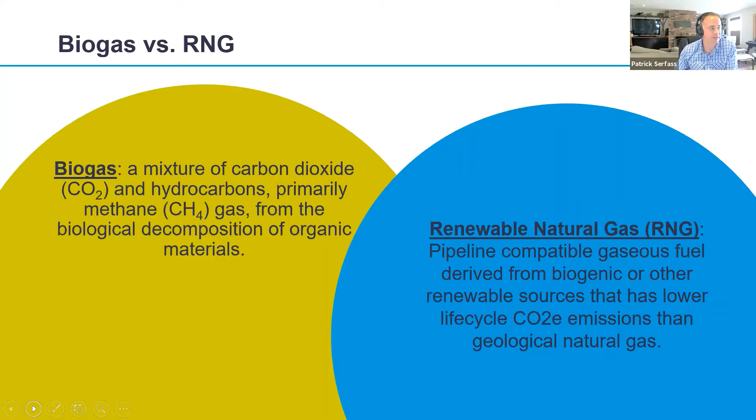And at that point, you can't really recognize the RNG molecule from a regular conventional natural gas molecule, except it's been renewably produced, and you just know that because of where it came from, but it's completely interchangeable. So RNG, when we talk about that, is pipeline interchangeable gas. You don't put biogas in the pipelines, you put RNG in the pipelines, and you generally want to do that because you're trying to get it from the producer to your customer.

Next slide, please. So I was really struggling, and Travis and Josh and Brandon were all kind of subjected to my many questions about who was going to be in the audience today and how much do we cover basics versus policy. I can just tell you that all of us are equipped to get into any level of detail that you want. I'm going to try to start at a very beginning level to make sure that anyone that's not really familiar with biogas systems has a basic level of understanding of how all this works and really how these systems are tools for you.

And what you should be taking away from this graph, besides the basic way that biogas systems work, where you have this central tank that takes in organic material. Usually it's non-woody organic material, and you can see all different kinds at the top there: manure, wastewater, sludge, food waste. You're putting that organic material into a tank. The microbes that are already present in that material, you create a nice warm environment where they multiply, and they literally eat up the organic material and burp out methane. And that methane is captured in the flexible roof or covers in the case of Brandon's and Jim's projects.

And you capture all of that methane, and then you use that to basically displace fossil fuels most of the time. And all the things at the bottom there, all the different products that biogas systems can produce. So you've got your gas-related products on the left there, your biogas, electricity, vehicle fuel, into the pipeline to use for whatever you use natural gas for, heat. These are some of the most common products, although we also create bioplastics and things like that.

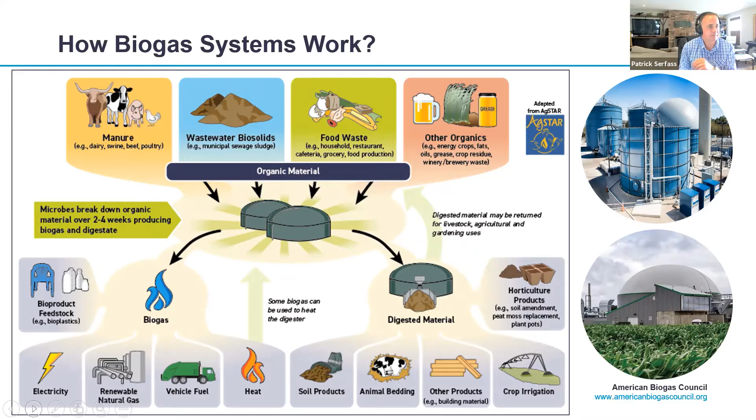Here's just some visuals for those biogas uses. So electricity, generally we're making electricity using an engine, a natural gas engine, but it could be a microturbine or a fuel cell as well. Heat there on the bottom, just like in your home, if you use gas for heat. Dell Computers, I talked about bioplastics. They actually shipped a lot of their computers in plastic bags made from biogas.

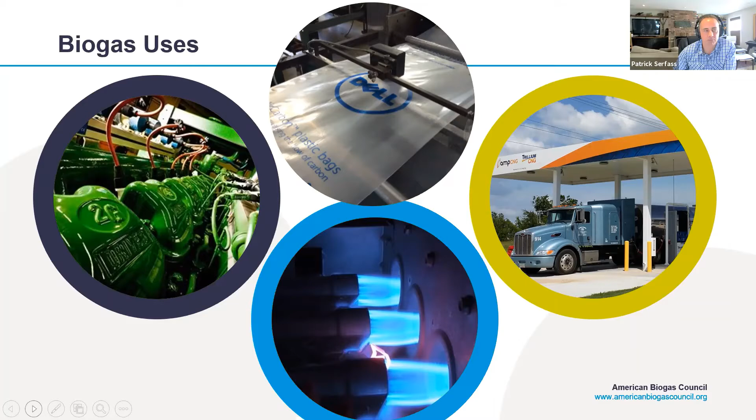Biogas has a hydrocarbon in it, methane, and so you can do all kinds of things with hydrocarbons, including making plastic. And then you can see some truck fueling. Heavy duty truck fueling is the fastest growing part of the industry. I'll get to that in a little bit. Next slide.

And here's what the digested material looks like. So you can see some liquids there on the bottom right. On the bottom right there, that food scrap project actually happens to be that Walt Disney World project I mentioned earlier. And on the left side, you can see what I'm pretty sure are two dairy-related digestates there as well. And that's the digested material after it's been processed by the biogas system.

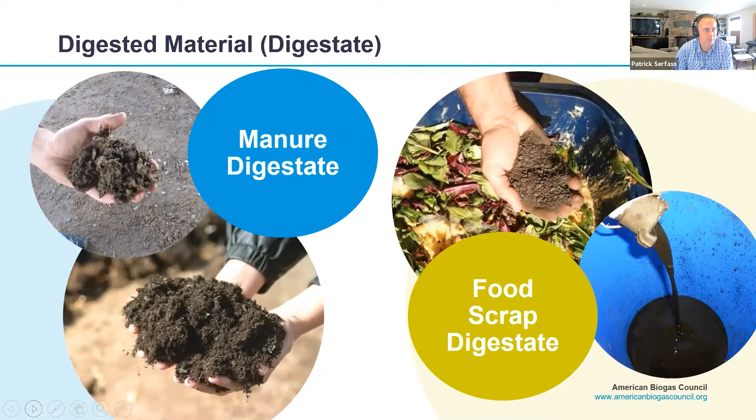Next slide. All right, so now that you have some kind of general familiarity with biogas systems, let's talk about the market a little bit. Currently in the US, in all 50 states, there are biogas systems. There's about 2,200 operational systems around the country. So there's a lot, but when you compare that to the potential in the industry, we have really just scratched the surface. We count at least 15,000 new systems that could be developed.

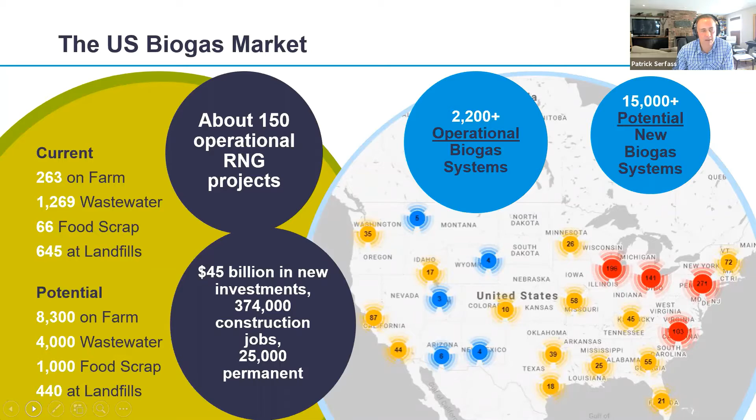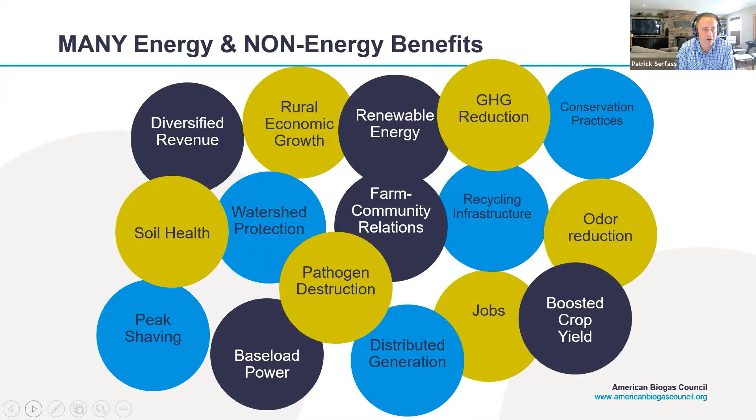Is it to create jobs? Is it just to protect the watershed, to be able to keep nutrients out of the waterways? Or in the case of South Chicago, is a facility trying to turn brown fields into green fields by improving the soil health and growing crops for urban areas that are food deserts? There's opportunity everywhere, rural and urban. Next slide.

So here is my policy slide, and I'm going to go very light on this because I know Brandon and Jim can get into this more if we want to. We can get into this in questions. But the big circle there on RNG drivers, that's where all those 9 out of 10 project developments are happening. So there's a federal renewable fuel standard administered by the EPA, and a California low carbon fuel standard

administered by CARB. And what those programs basically allow you to do is, if you're making RNG, taking your biogas and turning it into RNG, instead of selling that for what you can sell natural gas for at $3 an MMBTU, you can maybe sell that for like $9 to $90 an MMBTU. And that margin there is what has so many companies excited about building biogas systems and trying to get involved in this industry.

There are other drivers as well, food waste recycling policies to encourage food waste to be recycled. We've got 9 states that have those. Other states are trying to develop LCFS related programs. Washington just passed theirs on Sunday. It's to the governor's desk. And we also have companies like L'Oreal and Cargill and Anheuser-Busch and others who are just deciding that they want to buy RNG instead of conventional gas to be able to lower their carbon footprint.

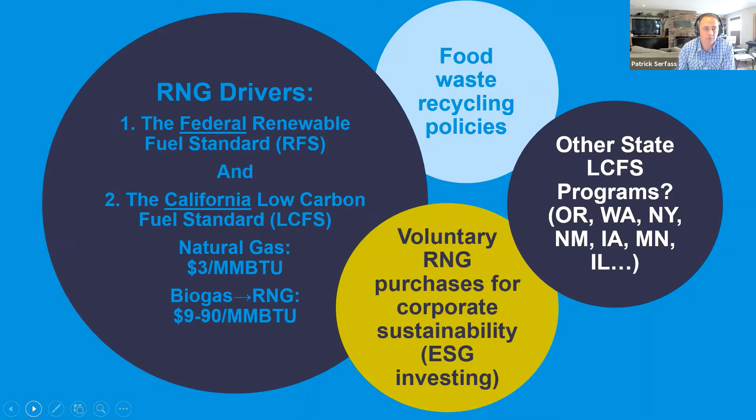Next slide. And this is my next to last slide here. So thanks for bearing with me as I try to take out the fire hose here and see if you guys can drink from it. So this is why, from a carbon perspective, biogas systems are so attractive. And because they're so attractive from a carbon perspective, that's why they can be so lucrative.

This is a graph of all the different kinds of renewable fuel that's generated in California under their low carbon fuel standard. That was one of the major drivers I mentioned earlier. So you can see there's biodiesel in those blue bubbles at the top and renewable diesel in the brown ones. Down near the bottom, you've got electricity projects. So those are basically like solar to wind to electric vehicles. These are all vehicle related programs in this particular case. And those yellow dots in the middle are your biogas.

So you have some landfill projects that are only a minor reduction in greenhouse gases from the dotted black line, which basically represents conventional gasoline and diesel vehicles. But even those are offering a 30 to 40% decline. Most projects are basically starting around a 50% reduction in greenhouse gas emissions. And then you look at some of the dairies and the hog projects, and even a hog farm going to biogas to electricity to electric vehicles, and you start seeing you are way on the negative side of zero. Those are carbon negative projects.

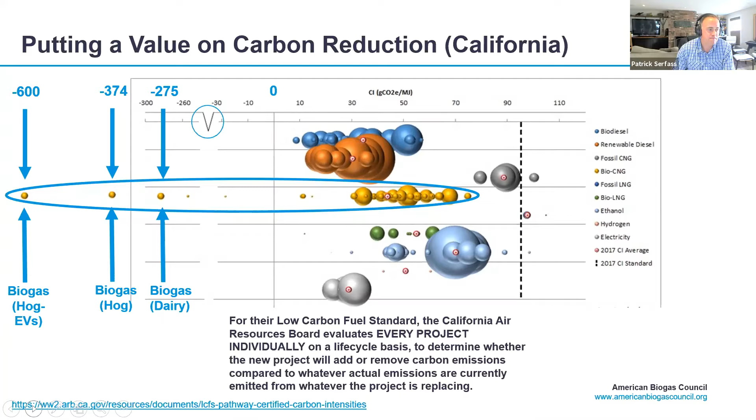So thanks for allowing me to help walk you through the biogas industry and biogas systems. Look forward to hearing Brandon and Jim, and look forward to your questions later. Thanks so much.

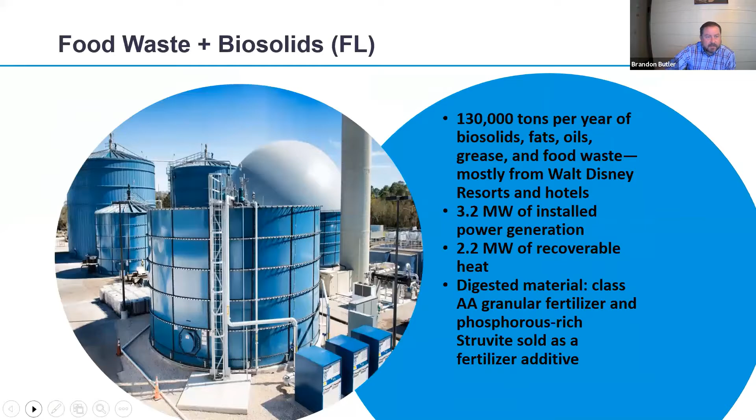Perfect. Thank you. Thanks for inviting me. Craig was out here visiting with our governor here in Utah, and he said on Monday, "Hey Jim, would you mind doing this for me? I'll be on a plane back to North Carolina."

So I'll do my best to cover for Craig. As most of you know, Craig's very schooled in this, and I'll try to pinch hit for him.

So here at Smithfield, why don't you go ahead and advance to the next slide? We have a lot of sustainability programs, and we feel like our sustainability programs really differentiate our products and our brands from our other competitors, and then they also make us more efficient and competitive. And our biogas projects go right along with all of our sustainability programs. Go ahead, next.

We have an overall carbon reduction goal at Smithfield, and it's to reduce our greenhouse gas emissions by 25% by 2025 using a 2010 baseline. Next. So if you look at Smithfield, our overall contribution to our carbon footprint, really, we have 15 to 20% in grain farms and feed milling. The big leg is 40 to 45% in manure management. There's a portion that's consumers and consumer packaging. And then the last 15 to 20% is really the non-grain feed, the production, the packing plants, and some transportation. Next.

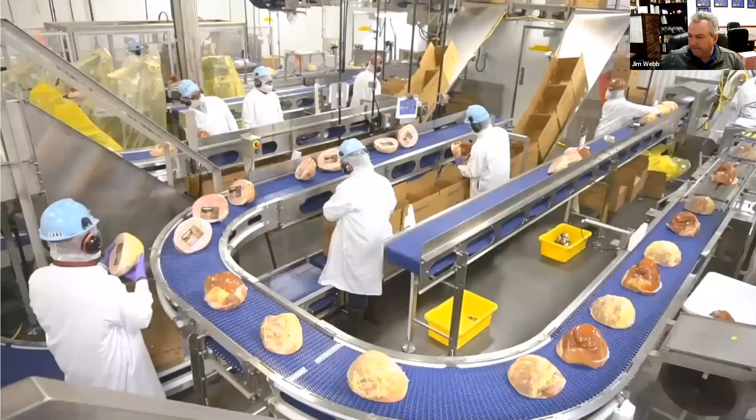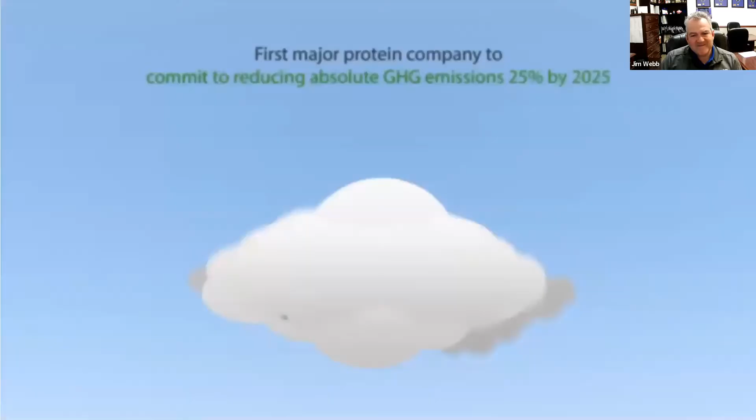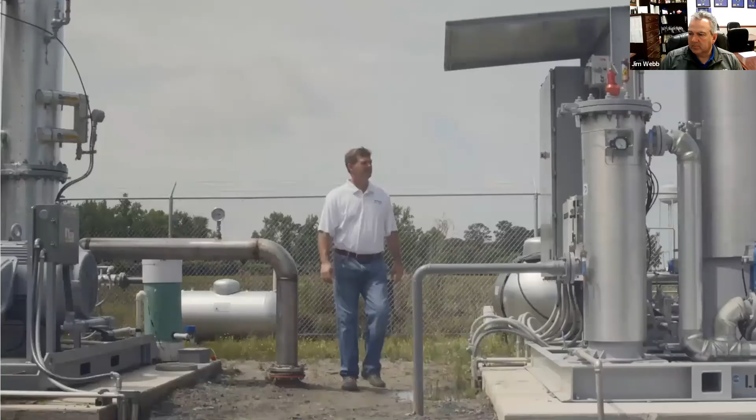At Smithfield Foods, everything we do is focused on producing good food responsibly. As a global food company, we're committed to doing business in a sustainable way throughout our entire supply chain. That's one of the reasons why we were the first major protein company to set an ambitious goal to reduce our greenhouse gas emissions across our entire supply chain 25% by 2025. To reach that goal, we created a platform called Smithfield Renewables. Smithfield Renewables is really the platform that we use to ensure that we make our carbon reduction goal. As part of that, you'll have biogas projects, you'll have fertilizer optimization, grain supply chain projects. You'll have a lot of different things that come together.

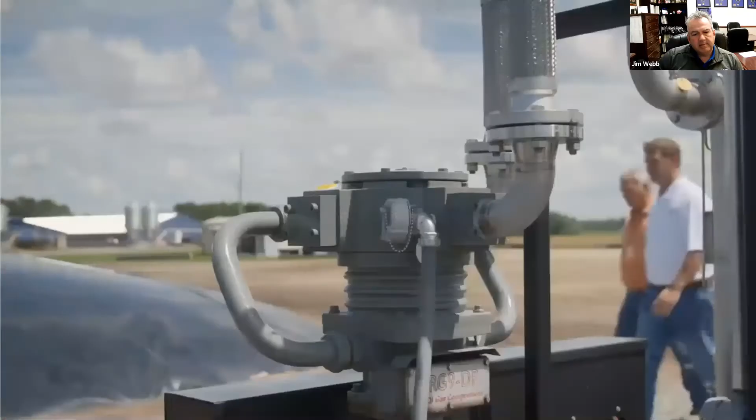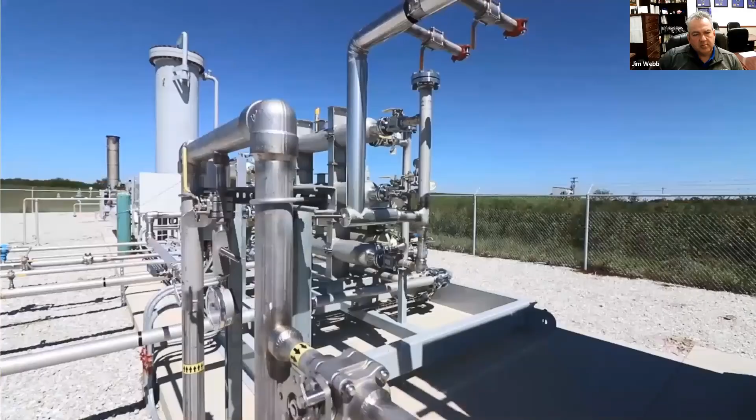Important initiatives within the Smithfield Renewables platform include the utilization of renewable biological materials from manure treatment systems at our hog farms to create sustainable fertilizer, manure-to-energy projects that transform hog manure into renewable natural gas, and the reestablishment of native grasslands and prairies to create habitats for monarch butterflies and provide biomass for methane generation in renewable natural gas projects. Smithfield has long been a leader in the area of sustainability and innovation in our industry. These type of projects just further allow us to explore opportunities beyond what we've already done. Learn more about Smithfield Renewables at smithfieldfoods.com/renewables.

There we go. So, all of our biogas stuff right now is being focused on manure management. That's our largest contributor to our carbon footprint. Like I said before, 40 to 45% of our carbon footprint is manure. So let's click on the next one. The way that we affect our carbon footprint with the 40 to 45% on manure management is really that we capture the gases that are released, and we convert those. We clean it up to make methane and renewable energy, and we found that this is the most cost-effective way to remove those greenhouse gases.

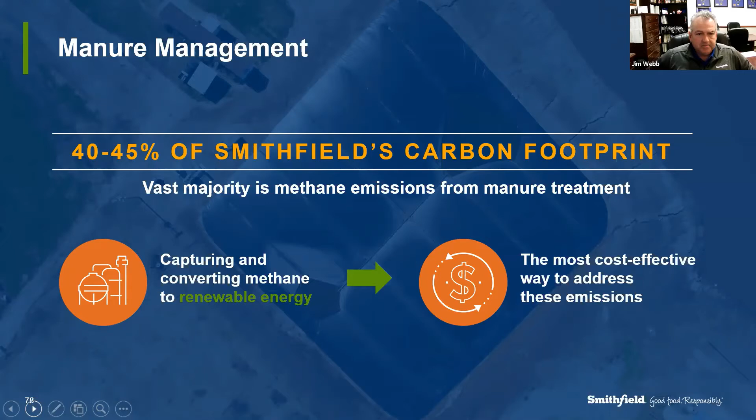Go ahead, next. So the way that we do that is that on our farms, just like Patrick was saying, the manure from the animals goes to a covered digester. The gases, the emissions are collected underneath a cover. The biogas then gets cleaned up through a filtering process to become 99% pure. Once it's pure methane, then it can be injected into a natural gas pipeline and transported to the end consumer, which is the customer, to heat their homes or use for transportation or whatever they choose. Go ahead.

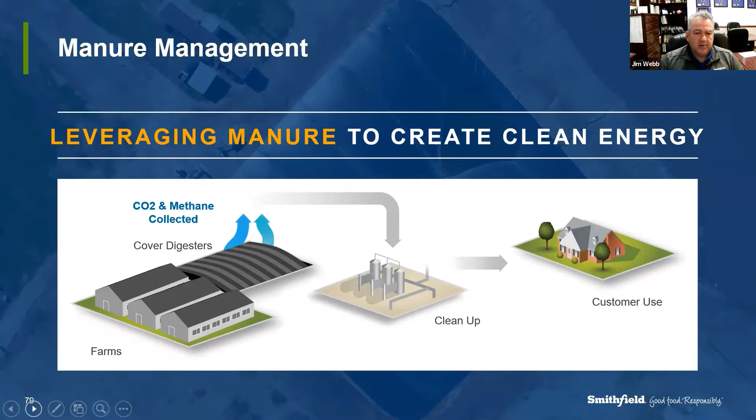And here are the benefits that we see at Smithfield of the renewable natural gas. Obviously, it's to reduce our greenhouse gas emissions. This type of energy produces 24 hours a day, 7 days a week. Unlike other renewable energies like wind or solar that are only producing while the wind is blowing or the sun is shining, we can produce gas pretty much around the clock and process that gas. It definitely improves our manure management, and it also provides a revenue source for many of our family farmers. Okay, go ahead, next.

We have two joint ventures that are set up with our partners. One is Dominion Energy, that's under the Align name. So Align is the company name, and it's a joint venture between Smithfield and Dominion. And then we also have another joint venture with Roeslein, and that joint venture is called Monarch. So I'll talk about those two different companies separately on the next slides. Go ahead.

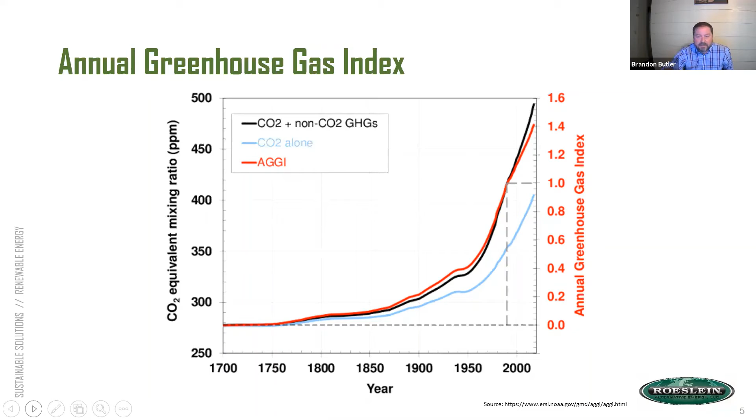Next slide. Annual greenhouse gas emissions have skyrocketed. It's no secret anymore. I think Lindsey Graham came out and said he believes in climate change now. So I think we've actually got everyone at this point to believe in climate change. It's happening. Greenhouse gas emissions have skyrocketed, and we all have to do something to address this. This is our plan here at Roeslein. Next slide.

We're seeing it in cost as well. The natural disasters that we're experiencing across the country, the fires out west, the storms here in the Midwest, the hurricanes, the escalation of the disasters across our nation are costing us billions of dollars a year. Next slide.

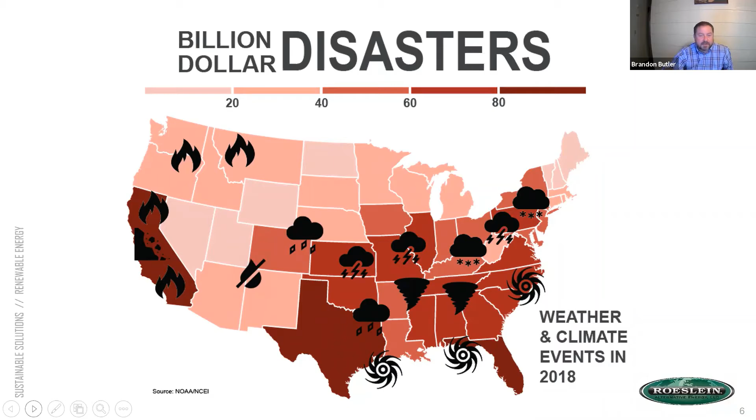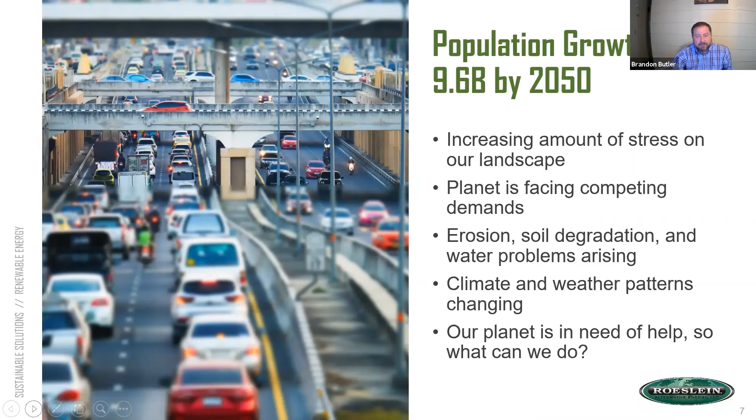Population isn't slowing down either. We have more people that are going to require energy, that are going to require food. So while we're going to continue to produce food and supply these people with energy, we have to do it in a way that is much more environmentally friendly and beneficial to our landscape. Next slide. Ecosystem. Next slide.

So soil erosion is a really big problem here in North Missouri and across the heartland. Cropland soil erosion at 5.6 tons per acre with a cost of about $44 billion a year. We see a lot of kind of archaic practices here in the heartland, especially in North Missouri, where we're really focusing the rollout of what we're going to call Horizon 2 at Roeslein, which is set to address these issues.

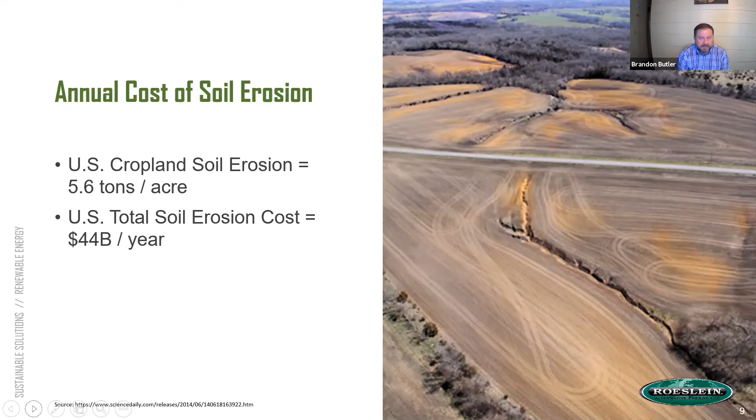But that erosion is washing downstream, and it's taking a lot of the pesticides and insecticides into our waterways, costing us a ton of money in cleaning our water before it can be drinking water again, and then costing us a lot of money in the Gulf of Mexico through the problems of hypoxia. We have a plan to fix this with native grasses. Next slide.

Missouri, Iowa, Illinois, we're more guilty than anybody for the problems that we're experiencing in the Gulf of Mexico, the extent of the hypoxic dead zone that's occurred down there. I don't know if anybody goes down to the Gulf to fish or recreate. I spend a lot of time down there, and it's disheartening when you go a few years later and areas of the marsh that you used to fish, they're just water. It's almost like the equivalent of the rainforest, how much marsh we're losing. And there's a lot of economic reasons why that's very bad. Next slide.

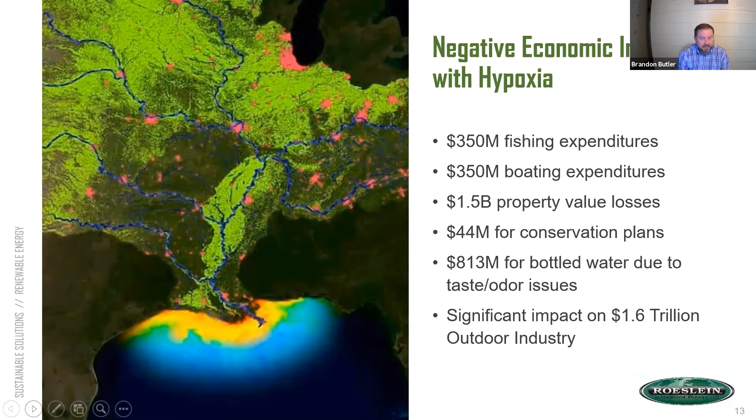$350 million in fishing expenditures, $1.5 billion in property loss, nearly $1 billion in bottled water due to tainted water for people to drink. We're sending this down to our neighbors, and we need to do something about it. Next slide. Next slide.

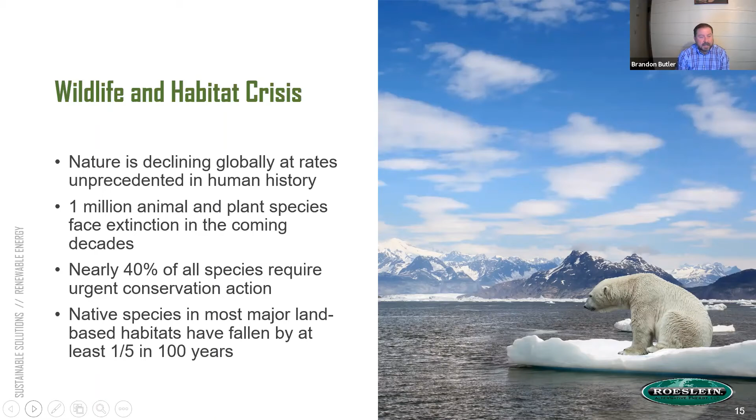Next slide. So wildlife and habitat across the country is in crisis. We know about the megafauna. We know that there's polar bear problems, but nearly 40% of all species require some kind of urgent conservation action. Native species in most major land-based habitats have fallen by at least 20% in the last 100 years. Next slide.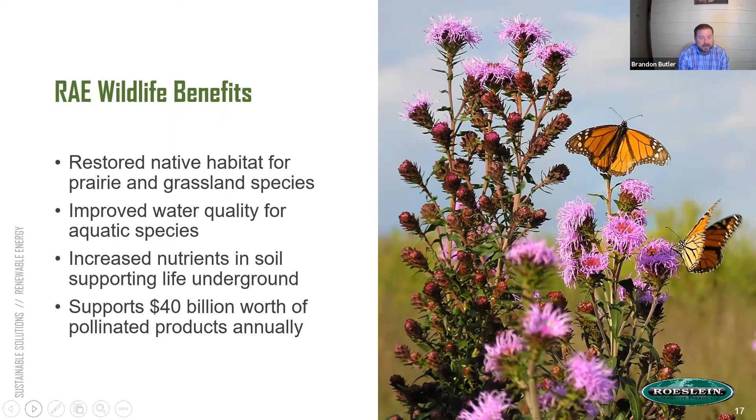So we're in the partnership with Smithfield to digest the swine manure to gas, but we're also working on the restoration of native grasses. We have a vision to restore 30 million acres of native grass across the heartland in a 30-year period. We'll be able to digest those natives into renewable natural gas as well, while creating habitat and providing those benefits that are necessary to wildlife and pollinators. Next slide. Next slide.

So currently we have 80 lagoons covered in North Missouri on Smithfield Farms. Lagoons are about a 4-acre pond. The hogs are in a very nice barn. Those barns have a grated floor system. Their manure goes into the lagoons. It's washed in there using recycled water. So we use almost no carbon-based electricity to do that. Through the natural process of anaerobic digestion, the covers that we put over these lagoons, they build up really large like a blimp. We suck that gas off.

It goes through a gas purification system on site. And at 2 locations, it's directly injected into the natural gas grid. And at the rest of the locations, it's transported through what we call a virtual pipeline, which is a high pressure tanking system.

This is great for the local economy. It's great for people that live in the area. If you talk to any of the neighbors about how the air quality and their quality of life has improved since these covers have gone on the lagoons, which essentially eliminate the odor coming off of these farms, you have some happy neighbors.

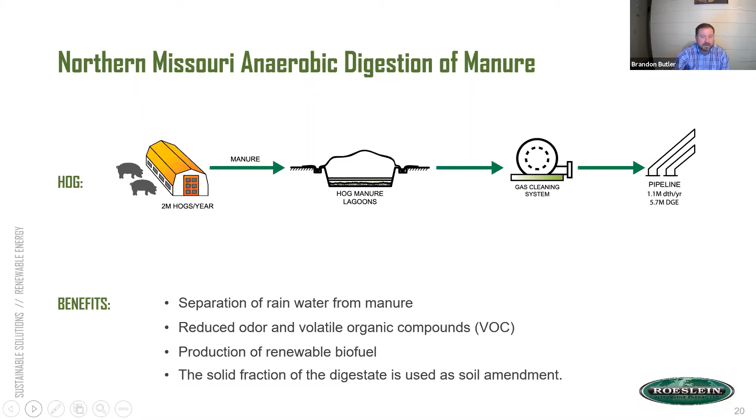We're creating great jobs that are highly technical, well-paying, and we're allowing young men and women to find jobs in economically depressed areas that they may be from, but otherwise would have had to leave to achieve this kind of a position. So doing great things in rural Missouri and across the country. Next slide, please.

We're currently working through a grant in conjunction with Iowa State and Penn State called C-CHANGE. It's a $10.5 million grant that's studying the feasibility and best practices of being able to plant, sustainably harvest, and digest cover crops and native grasses into renewable natural gas. It's looking like we will probably end up mixing that biomass into the lagoons to further create gas on the systems that we already have.

This is going to be a great way to incentivize landowners to stop planting row crops on marginal lands that aren't producing enough revenue to even cover their input costs, restoring native grasses, outcompeting government for those acres. A lot of these acres are currently enrolled in CRP. At one time, we had over 40 million acres of Conservation Reserve Program lands being paid out by the government.

We're hoping to be able to pay more than the government and return control of these lands to the landowners, harvest those native plants sustainably, meaning we won't do it during peak nesting times or peak migration times to make sure that the wildlife benefits stay intact. And then the ecological services that are provided by these grasses, including the deep and robust root systems, not only absorb water, but they block those pesticides and insecticides from entering into our waterways. Next slide.

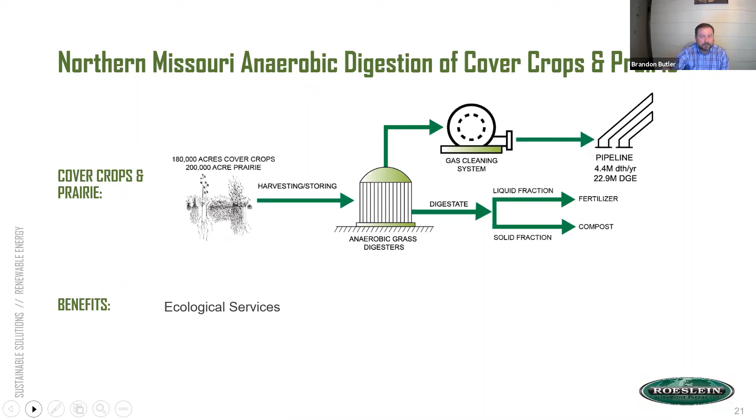So really, we're trying to provide ecological services that benefit water, soil, climate change, habitat, carbon usage, and carbon sequestration, while producing a renewable energy source. Next slide. Once in a while, we let the engineers play with our slides, so they made this one. So this shows you kind of the whole system, what's going on with the clean water going into the lagoons to flush it, into the covered lagoons, and really everything that's going on in the entire system.

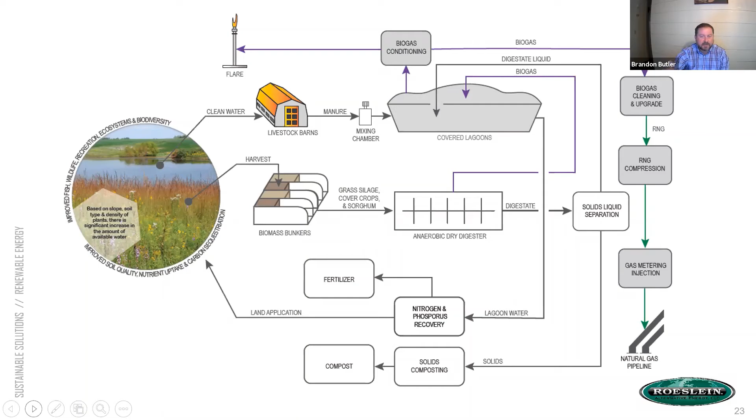It's pretty complex, but really what it breaks down to is nature takes care of breaking down the manure, breaking down the biomass. Through the natural process, methane and other undesirable gases are produced. We're able to separate those gases through our system. We're able to turn the methane into renewable natural gas and flare off the undesirables. Next slide.

There's a lot of potential for this. In North Missouri alone, we see the potential to create 5.5 million decatherms per year. Last year, we generated close to 350,000. This year, our goal is going to be 600,000, and next year, our goal is 800,000, ramping up to that 5.5 million over time. With a revenue potential of nearly $250 million and the equivalent of removing about 29 million gallons of diesel fuel from our roadways. So that's petroleum-based products that will no longer be required, that'll be supplanted with a clean, renewable energy source.

Next slide, please. Same information, different slide, really. Next slide. Now, when you take this out across the heartland, across the nation, we think 1.8 billion decatherms of energy per year. A lot of that coming from cover crops. We like to say that you should never see brown dirt on these agricultural fields. There's no reason to let these fields sit dormant, allowing rain to fall on it and wash away whatever is on top of that soil, and to wash away the soil itself.

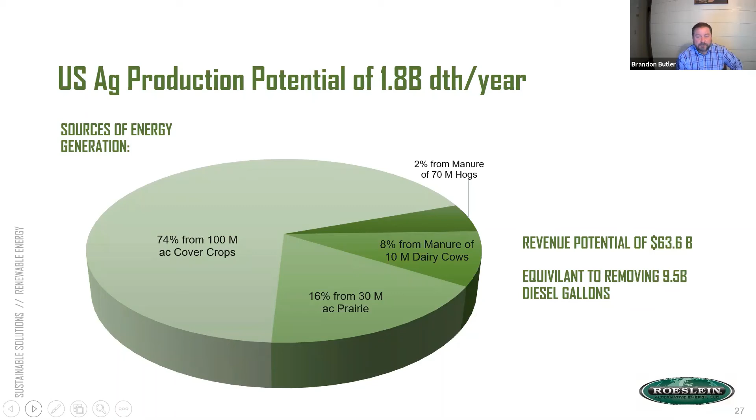So we think we can create this market of renewable energy production from cover crops, and essentially putting these farmers into a whole new economic market. Revenue potential of close to $65 billion, and the equivalent of removing 9.5 billion gallons of diesel fuel annually. Next slide. Next slide.